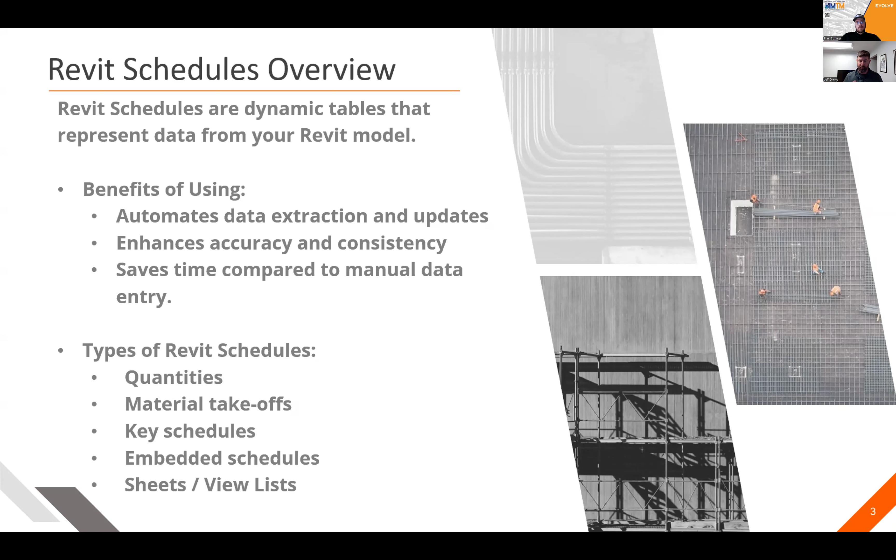And that might include quantity takeoff, material takeoff, and some other examples that we're not going to touch on at all, but just as a general overview - key schedules, embedded schedules, and then sheets and view lists.

So I guess at this point, let's open it up to the general Q&A. If you have any questions regarding how we create schedules, how you do something in a Revit schedule, mostly related to quantity takeoff around the MEP coordination, submit those questions now. In the interim, we're going to let Blair take it away showing how some schedules work in the ITM world.

All right, so ITMs, as we know, are not a Revit family, so they act and behave a little differently. Sorry, okay, everyone can see my screen, correct? I just got a one here. Yes, okay. So here I have just made a very simple...

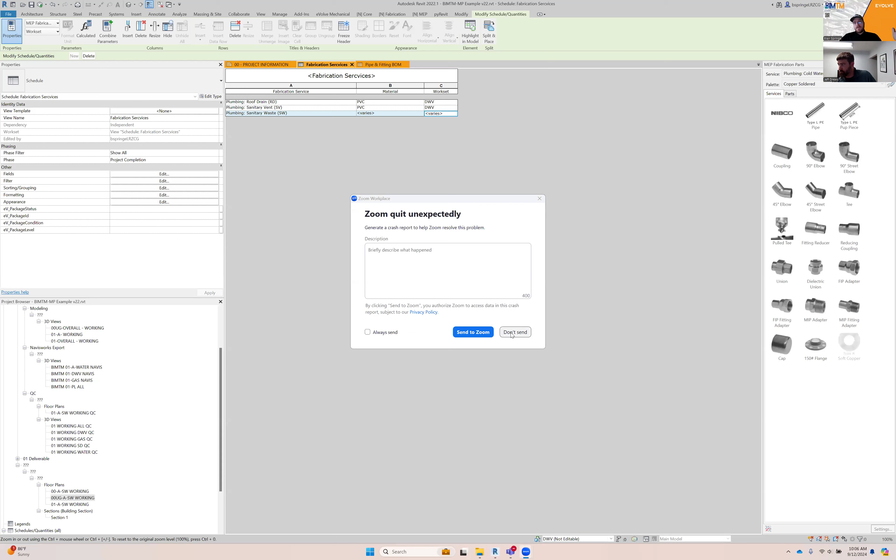Oh. You still there? My Zoom just restarted. Oh, okay, I apologize. All right, back to this.

I made a very simple schedule just to show our overall fabrication services within the project, as well as material of that service and work set that it's on. I created this to show a brief overview of the project, what services are in it, and use it as a tool if needed for changing.

Oh, looks like maybe Blair's internet froze or something. I guess in the interim, somebody submitted a question here. It says, does this seminar include electrical panel schedules?

It can, I'll say. I don't want to get too deep into that just because there's a lot of setup involved, and I don't necessarily know that the template I'm utilizing here has all of that set up.

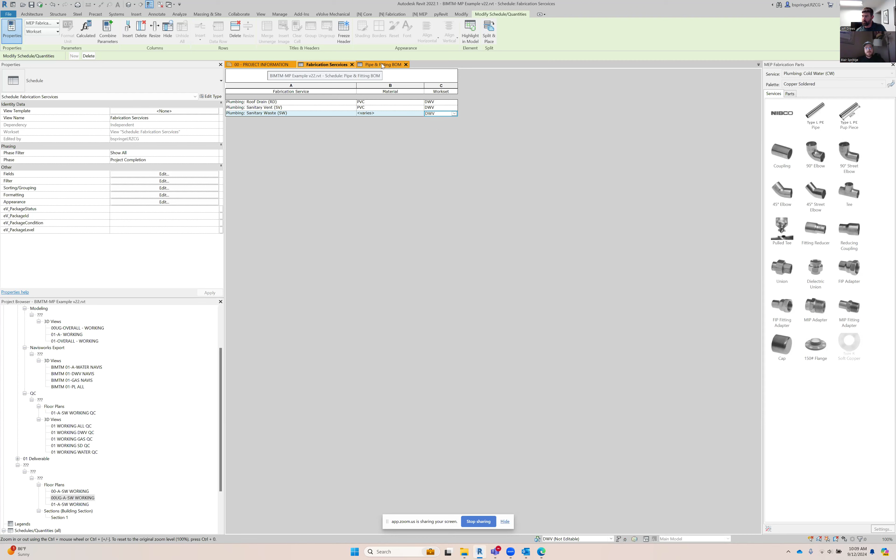Now getting into something that's a little more useful for the project and used for your purchasing team, a pipe and fitting bill of material. This bill of material is set up in a way where you have pipe and fittings on the same schedule, which has been a little difficult in the past.

And with ITM specifically, as we know, there's specific parameters that we can pull in. So for this one specifically, I've brought in count, size, product long description, and length. Now, your fittings don't have a length that really makes any sense.

So we have a conditional format to blank these out and only show pipe length, total length here. The way that we accomplish that is, like I said, conditional formats within the length here, which is set up to blank out anything that is not a Schedule 40 DWV pipe. So this is Schedule 40 DWV pipe down here, and all fittings are blanked out of length.

And this is a calculated total length column here to show the whole length of the pipe rather than it itemized every instance.

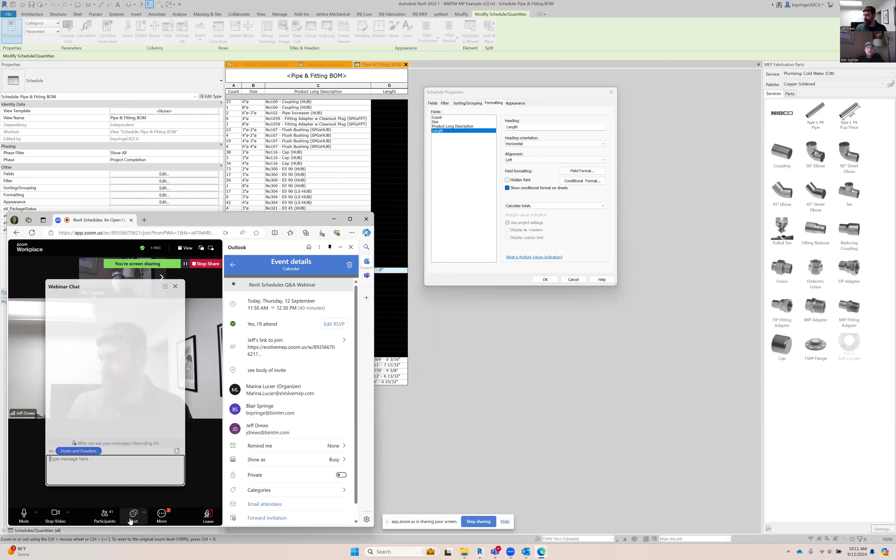But conditional formatting in scheduling, you could even use it in a way where you have columns show up red if something isn't supposed to be that way - so like more of a QC type thing. Correct. And with using those conditional formats, so we have set up the color.

We have two different questions here, Blair. I'm gonna let you field this one. So it says, how do you generate takeoff for cut lengths? Do you use a cut calculator or just add percentage to a bill of materials?

So right now your schedule is showing like total length, right? So we could potentially like sort this in a different way that we would get individual cut lengths, correct?

Yes. So it depends on how narrow you want to, how much pipe you want on that, right? So I was thinking about adding a reference level here. You can break this down per level or anything that you want to break this down by.

I mean, you could add a mark to the pipe and write in your custom parameter and sort by that if you wanted to, or assemblies if you're doing assemblies for spooling. You could sort it by that spool number by adding that parameter into your schedule.

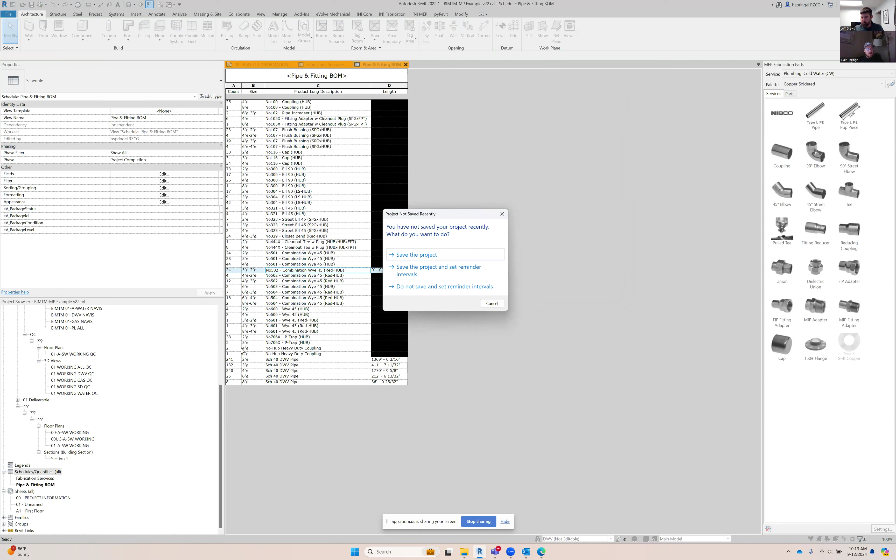We're going to make it sorted from MEP fabrication pipework, which is ITMs. We're going to want to get our cut lengths, so we'll do it by fabrication service, just to get it narrowed down a little bit. Let's add that.

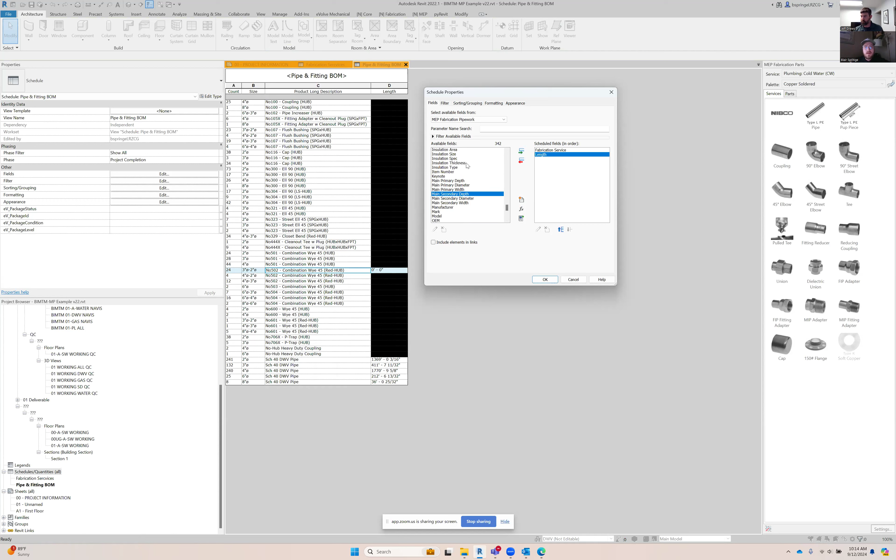We're going to need length, so let's go down to L for length. There it is. And maybe size or something - yeah, size would be good. These are sorted by how they're going to show, so let's do size of pipe, and product long description. So we're going to add that.

This is the service it's on, and that's the name of the fitting or the pipe. Size and length is in there. So let's go ahead and just make it, see what happens.

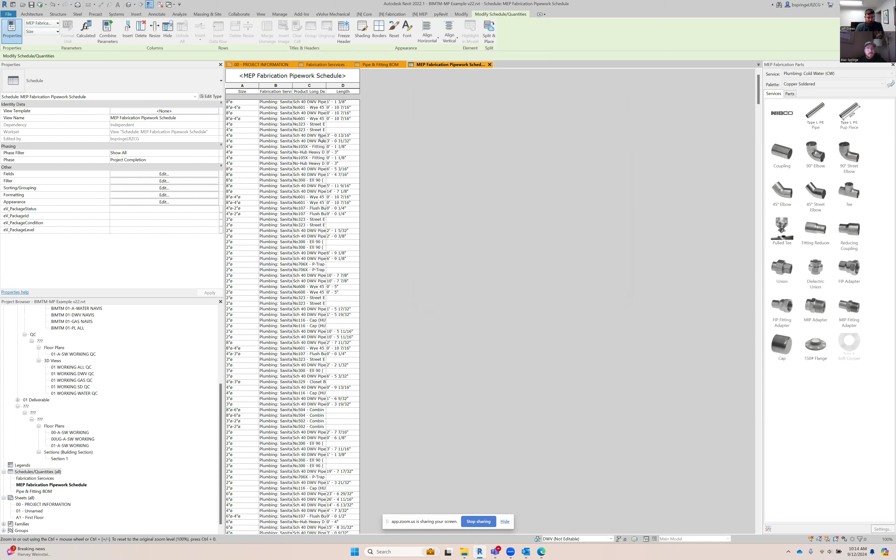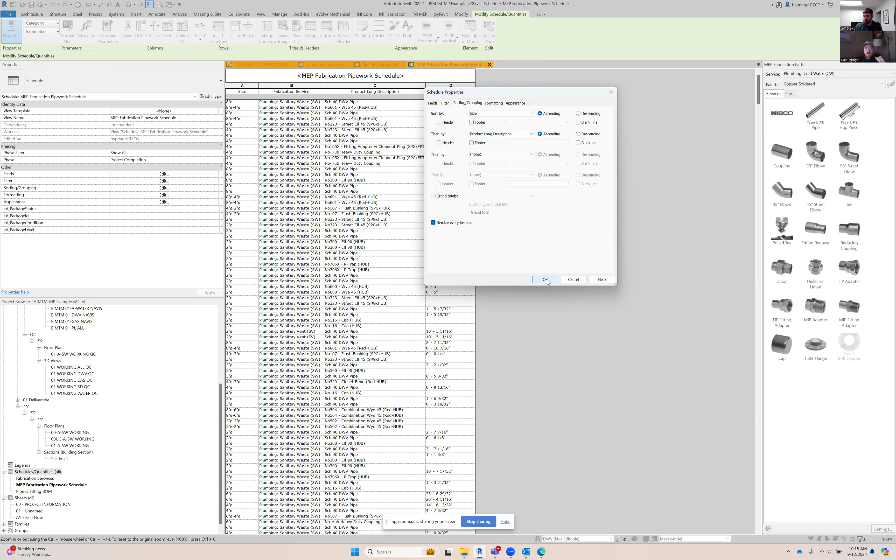Now we're going to want to get rid of fittings, so we have to start sorting those things out, which we'll use by sort by product long description. Actually, we'll do size first, then product long description, so it sorts in a way that we're used to. And keep that as itemize every instance.

So now we have all of this - this is all fittings still. We're going to have to get rid of the fittings by sorting that out by using conditional formats.

So if the product long description does not equal - I know the pipe on this one is DWV. Actually, I need to get the name, so I have to go back. Sorry, I apologize. There it is - Schedule 40 DWV pipe is what I need to conditionally format out.

Product long description equal to Schedule 40 DWV pipe. My mouse is all over - here we go.

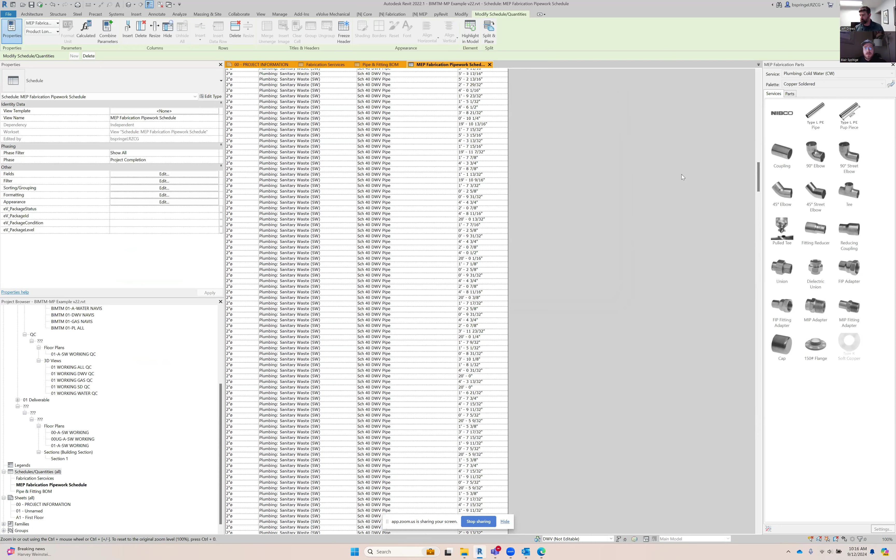So right now this is at the top. I haven't sorted it out completely, but as you can see, we have every length and size right here of every pipe. This is not really an optimized project - this is just a test project, so I don't have optimized lengths, and you see 20 footers or over that.

Looks a little funny - there's another, and that's kind of related to that too, so we can touch on that after. Sure, go ahead and add that now.

So I think to your point, the optimized lengths would do some of that, but I don't think Revit would handle that out of the box. You would need some kind of add-in to accomplish that, like Evolve. Correct. When using ITM parts, tools like Evolve really help with getting the information on the ITMs that you need to achieve the schedules at the end of the day.

Yeah, so like I said, and like this shows, the lengths are not optimized. They have not been yet, and that would have to be done first.

I got another one that came in that's kind of related to what you were doing there. So somebody's asking, do you prefer conditional formatting over utilizing filters? What are the pros and cons of it? Personally, they've always used filters, but they can see the benefit to this.

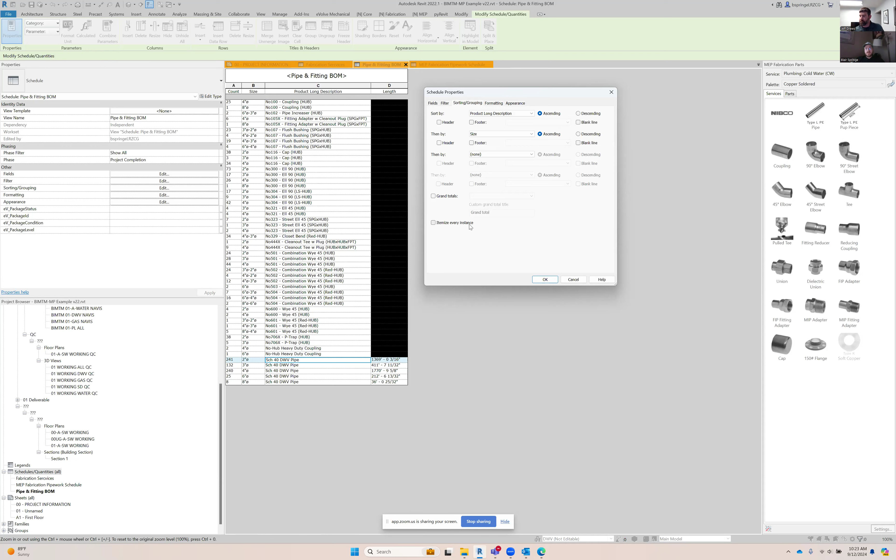And then with lengths, you just have to set this to calculate totals, and it will calculate the total length of all the pipe in the project. One more thing back here on this tab of sorting and grouping is itemize every instance needs to be unchecked. Can you go back to where it says calculate totals, and change it back to what it shows out of the box, which is no calculation? It would just say 'varies'.

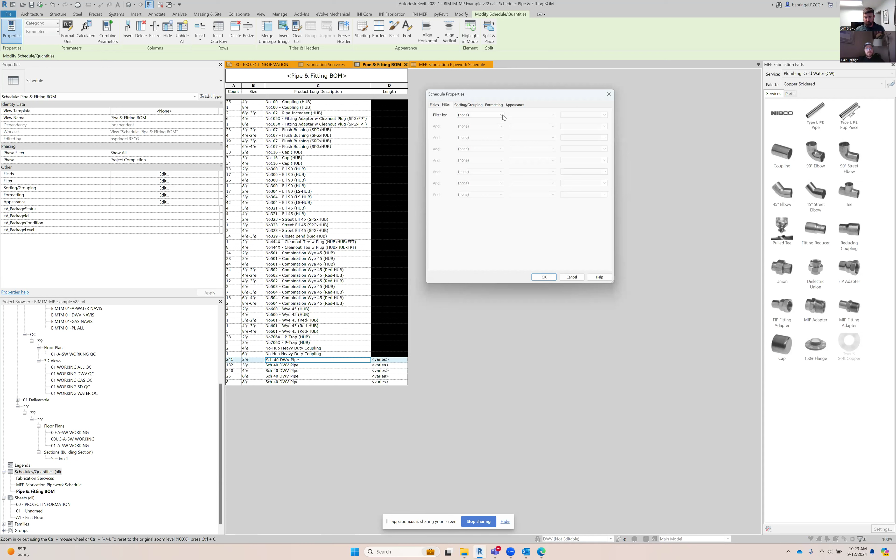So that step he showed is critical - correct, which is here on the length column, for each one of these I want to calculate the total of all of that. And that's why these numbers within the fittings just don't make sense - the back end length of the fittings doesn't correlate to size, for example.

Somebody asked, what if you have to add schedule 80 to the schedule? So as those are getting modeled, would they just automatically pop in, correct? Or do you have one that's more tightly filtered on that? I think they're asking if they wanted schedule 80 added to this schedule as well, how would you go about having both in the same schedule?

Schedule 80? Oh, hey, schedule 80 pipe. Correct, yeah, not like a different type of material. We're on the schedule topic, my mind is narrow right now. Even copper or whatever, something that's a little easier to keep straight in your mind.

So if I had schedule 80 within the project, it would just show here because I'm not filtering this by fabrication service. So if I drew with another fabrication service such as cold water, that would show up here immediately. So it's not filtered out currently.

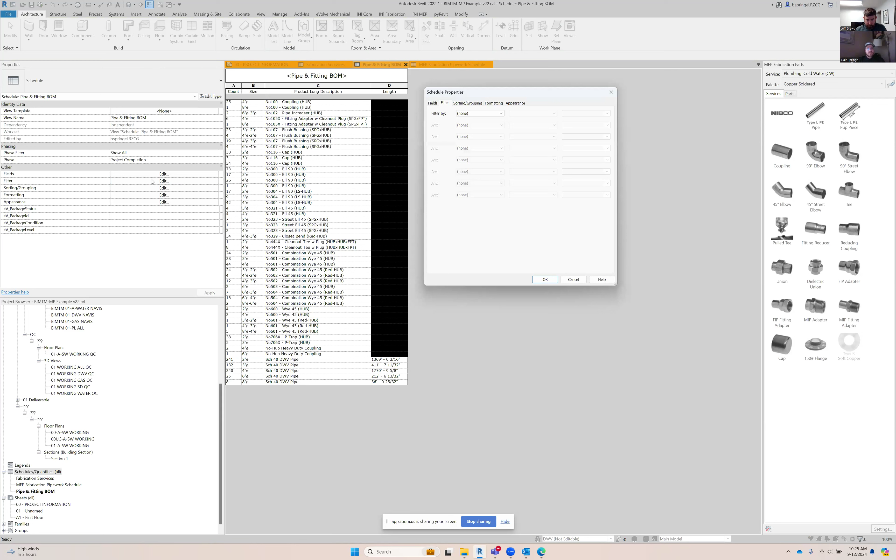Because we are sorting and grouping by product long description first, which is the name of the pipe.

There's a few other questions, so I'm gonna answer this one. Somebody asked, do families need to be set up with these fields in order for the scheduling to work? Are all of the fields inherent to the families, or do these need to be established for each project? I think your answer to this is a little bit different than my answer, so I'll let you answer that first.

So ITMs, the database lives within Fabrication CAD MEP. They don't live within Revit. Unless you know how, or you are the one who manages that for your business or company, it's going to be difficult to make any changes or add something. As far as Revit families, that's a different story, which Jeff could touch on. But yeah, sure, you can only pull from the few things that come through from Fabrication CAD MEP to Revit, and it's limited without tools.

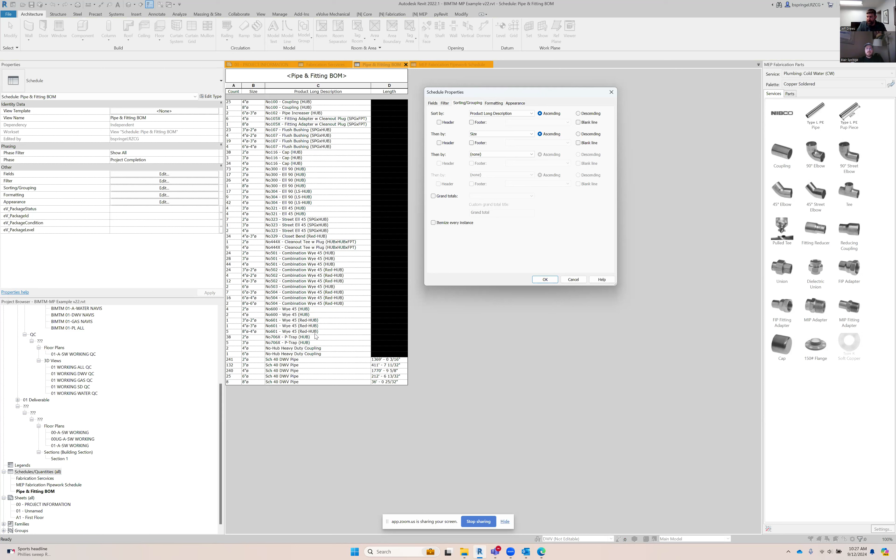So to touch on family versus ITM, Revit comes with some out of the box fields, but for the most part you have to set up your own, through shared parameters, and that shared parameter could be added to a family. Every time you add a family to the project, it comes with it. There's a few different ways to do it. But for the most part, I try not to use the out of the box ones, and I establish my own set of parameters that either exist within my families or within a template as a whole.

And same goes with ITMs though. A company should have an aligned parameter that comes through by default, like this product long description, for example, and all of these are named correctly and uniformly how you would purchase them. But to make any changes to this would be changing the database from Fabrication CAD MEP as far as ITMs go. A little more complicated.

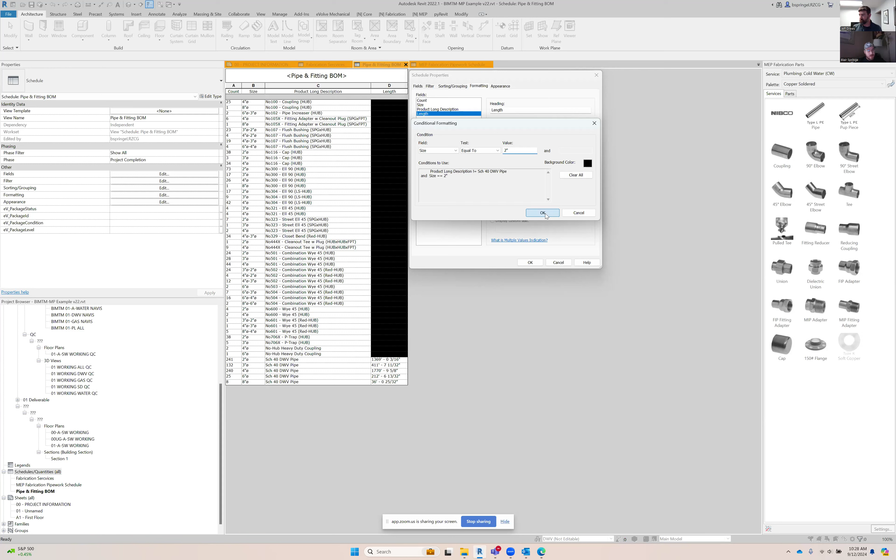As you can see, it broke my conditional format by adding that, and it did not do what I tried, because I think I do need to have the symbol in there as well.

There's a shortcut for it, I forget what it is. Yeah, it's something or other, of course. But there you go. Somebody said Alt 0216. Alt 0216, thank you, anonymous attendee.

Let's try that. And size 2-inch. So this is the bad part about conditional formatting, is now I can't edit that, and I'm going to have to clear it and then re-add everything. So you have to be very careful. That is the one downfall of conditional formatting, where filtering does better.

I think we could even set up another follow-up webinar and capture some of these questions and hit them specifically, because as we're going through this, there's even more coming up. So we can utilize the questions, we'll capture them, and we'll set up a webinar specifically about that.